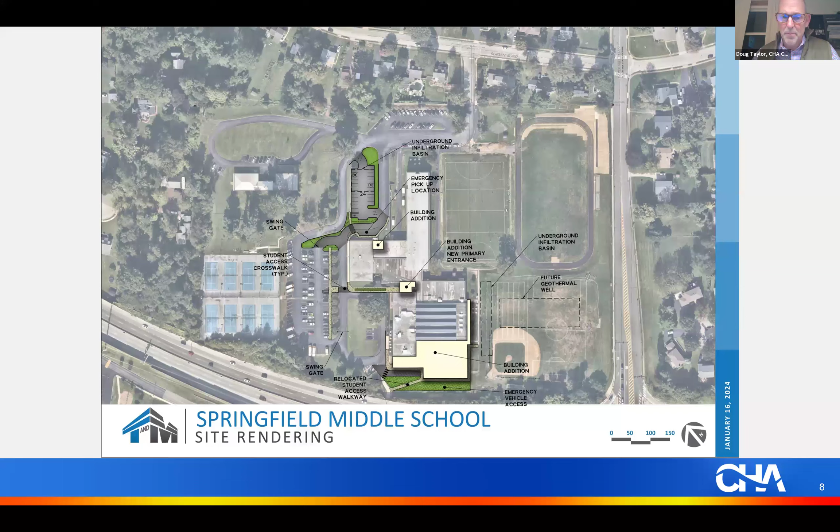Just to emphasize, really excited to be a part of this team and get this project started. My focus on this presentation is to talk about all things construction and what students may or may not see while they're actively at a school while it's under construction.

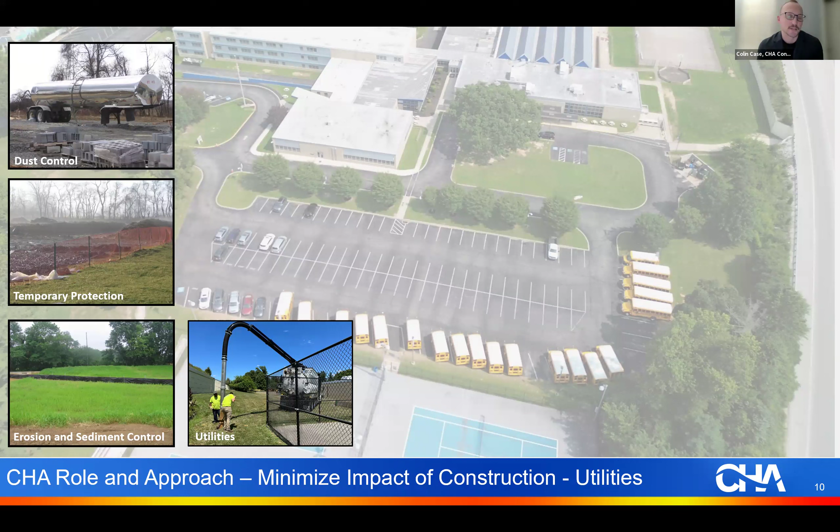Thank you. So we always make sure we have a student and staff first approach and construction second. So anytime we develop a phasing plan with the district, we always make sure that students are always separated from construction, and I'm going to talk a little bit about how we do that.

We also, Amy touched on, we're going to start having construction meetings with the team. Part of those meetings, we're going to start reaching out to the township and set up how we're going to perform inspections on the project, but also just start to build a really good relationship with the township.

And then the neighbors nearby. The district has been a great neighbor to all the local homes nearby, and as a construction team, we'd like to carry that through and make sure we keep a good reputation with everyone surrounding the project.

This project, we always make sure we're very sensitive and responsive when any issues come up. Construction is a little chaotic at times, but with our phasing plan, we try and reduce that to the best we can. However, if things do come up, we have such an experienced team, we can act quickly and get things resolved. However, we like to stay proactive at the same time.

We have a lot of proactive measures in place. I'm going to talk about them a little bit in more detail as we continue through the slides here.

We will have a very strong presence on the job site every single day. So there'll be strict reinforcement of any of the contract requirements, any safety programs, anything related to this project, will be on top of it.

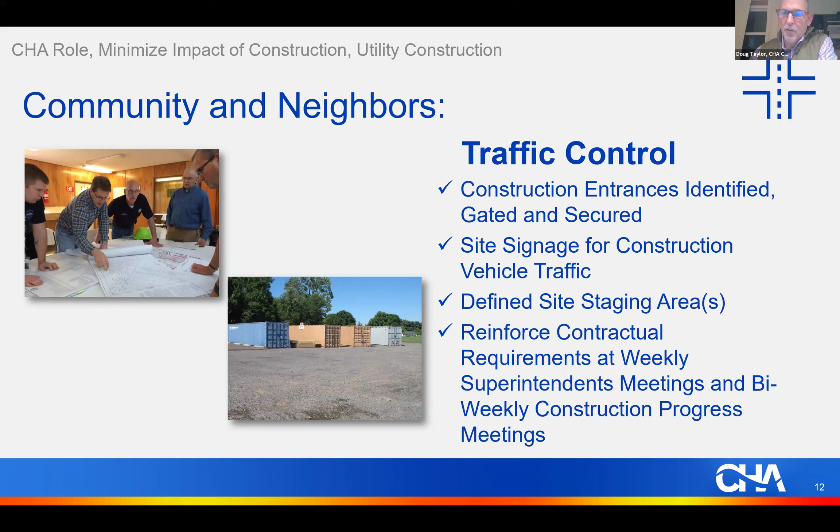So some of the things you typically see on job sites: we're going to have a decent amount of demolition going on in this project as we rotate around the building in the various phases. We have a strict construction waste management plan that'll be enforced by our team. Each contractor is going to supply their own dumpsters. There's supposed to be daily cleanup happening every day, so the job site should never look like a mess. You should drive by and say, wow, what a clean, nice looking job site that is.

And we'll be there to enforce that and make sure that's what you do see as you drive by the district. As I mentioned, there'll be chain link construction fencing and gates and entrances around the project. Those have been strategically planned with the district to work with the parent drop off, the bus drop off for students, and then staff parking as well and visitor parking. So that's been carefully planned ahead of this project before it was even out to bid, and now we're ready to execute.

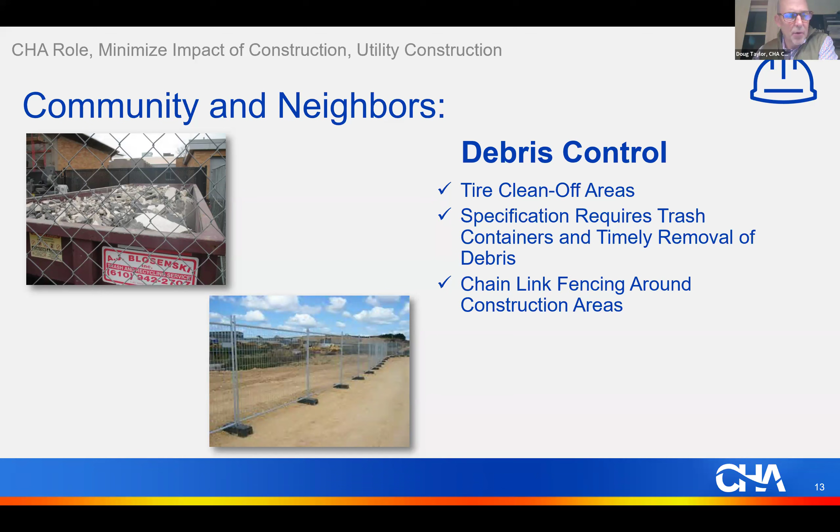And I'll also add to that emergency egress from any of the existing doors that might have been in that area.

So some other things that we're going to be maintaining while we're on the job site. I mentioned construction entrances, but there's a lot of other erosion and sediment control measures that will be out on the project. These are to make sure we keep the mud and dirt onto the job site and not onto the community roads or the school district roads. So there's things in place like rock filters, silt fence, and there's going to be a temporary sediment basin as we do some geothermal work out on the ball field.

And all of these measures are not only enforced by our team, but we also have support from the Montgomery County Conservation District, who will be making periodic visits. They're making sure we're keeping things maintained and keeping stuff off the road. So we have a lot of support from the local conservation district to not only enforce what we have in place, but also help us out if something does come up, because sometimes there are issues with erosion and sediment control, and they're always offering assistance. But I think we have a great plan, and hopefully we don't have any issues like that.

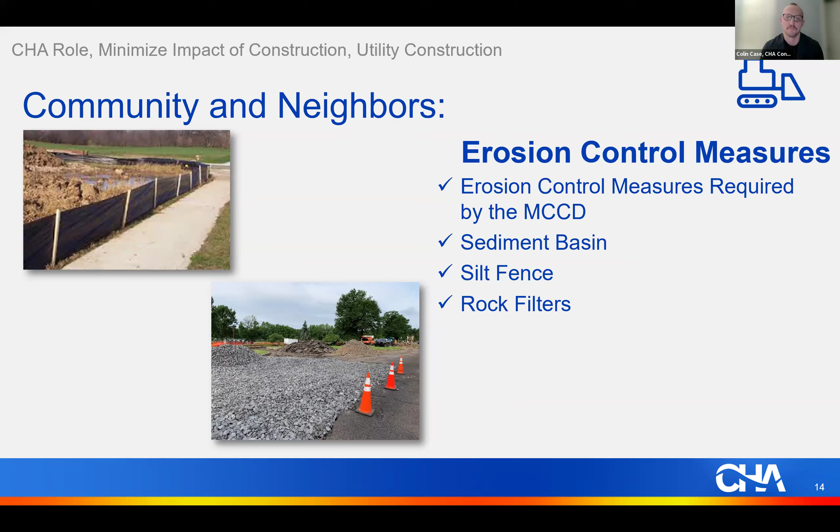Thanks, Doug. Next slide. Okay, some other things that happen on a job site.

This year in particular, we saw a lot of issues with dust on our projects due to the lack of rain we had over the summer. So what's great about our front end documents is we write it right in the specifications that if there's ever a point in the project where we see a lot of dust around the job site from lifts driving around, or anything construction related, the general contractor is going to provide some measures of dust control. Essentially what they do is bring out a water truck, spray down any area of construction that has mud and debris, and our staging area, and that'll keep the dust down and keep it from getting airborne. So that's already built into the job.

Then also, sometimes a truck may get into some mud and drive out on the road. We'll make sure that gets broom cleaned if any mud does actually exit the job site, and we'll be there to enforce that quickly and make sure it doesn't cause a disruption.

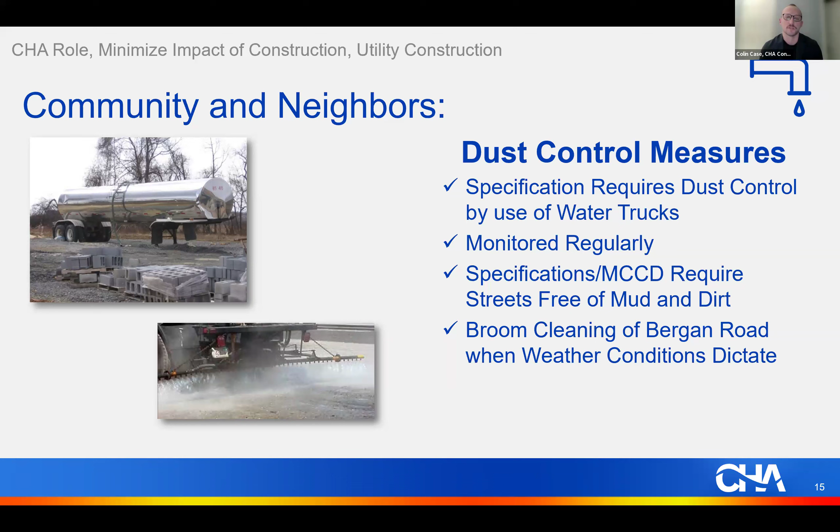As far as utility construction, we did a lot of careful planning during the phasing plans for utilities. They're very important on a project. You always want to have a very detailed plan of when utility shutdowns are happening. On this project, we have a couple: a relocation of a natural gas line, a domestic water line, and some stormwater work. Those are all phased so they will not disrupt the school in any way. If any shutdowns are required, we'll make sure they happen when students and staff are out of the building, over a weekend, or during off hours, to make sure there's no disruption.

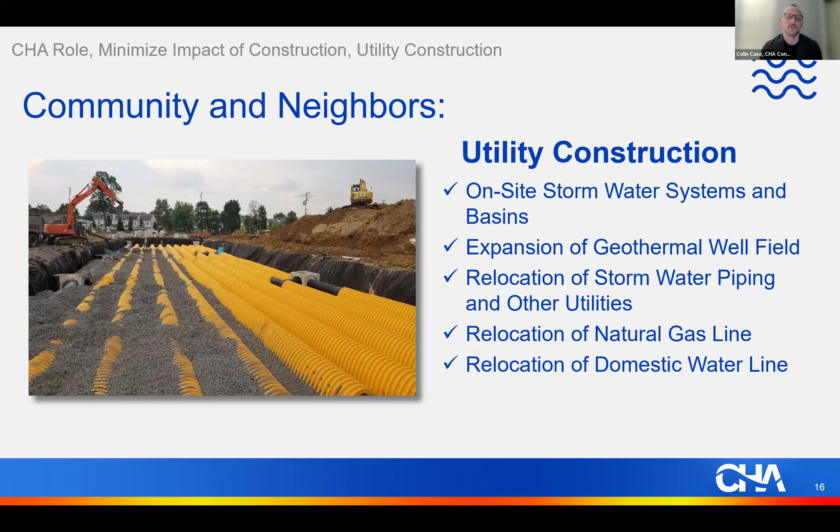There will be some things you see as you're driving by throughout the project. There's a picture here of an underground chamber basin for stormwater management. There will be two of these going in, mostly over the summer, where the existing entrance is now and underneath the parking lot. So when staff and students let out for the year, they'll come back to a brand new parking lot, and you'll never even know it happened. That's just one thing we do to make sure there's no disruptions.

I've talked a lot about construction phasing. We have prompt site stabilization, so when we tear up an area, complete the work, and put it back, it's going to be stabilized very quickly. We'll get it seeded and strawed and make sure grass is growing as quickly as possible.

Our phasing plans have been carefully laid out with traffic plans from the district, for student pickup and drop off and parent pickup and drop off at the same time. We meet almost bi-weekly with the school district team to make sure everybody's on the same page and we're continuing to communicate. I'm sure at some point we'll find ways to improve this plan, and we'll do everything we can to improve it, keeping school going first and construction second, hopefully in a harmonious way.

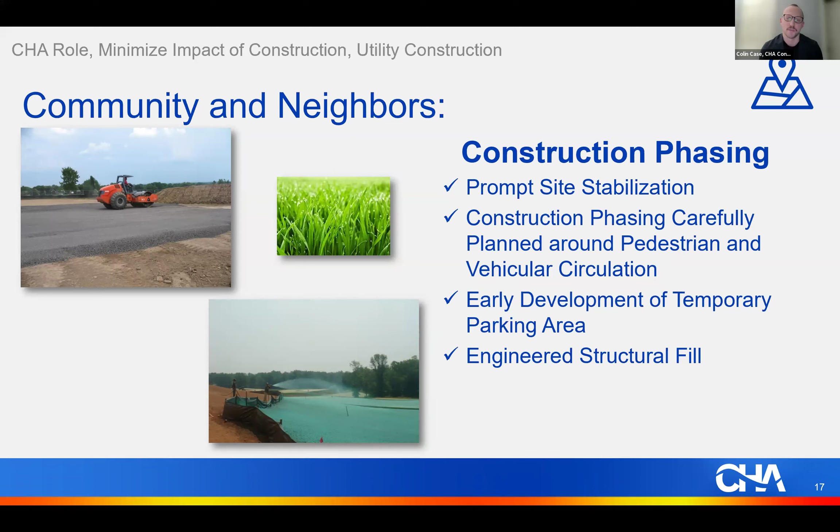As far as inside the building, you're going to wonder what your student will see walking through the hallways when there's construction on one side and classes on the other. We did a very good job carefully laying out construction and dust partitions. Essentially, we'll build a temporary wall, likely with a door on one side, going full height to the bottom of the deck, so there's no possible way dust can get out of that space while under construction. That barrier also keeps students out of the construction area and keeps contractors out of the building, since at no point during the school day can they pass over to the occupied space. These partitions won't just be a plywood sheet, they'll get painted and look like a wall. You'll never even know there's active construction work going on the other side of it.

They also help with sound, since sometimes there are noisy activities, especially during demolition. Our job while on site is to make sure any activities that create a lot of noise happen early in the morning or after school's out, so we don't cause disruptions. We've also carefully looked at when there's testing throughout the school year, and we make sure contractors work second shift during those periods so there's no disruption during critical testing times.

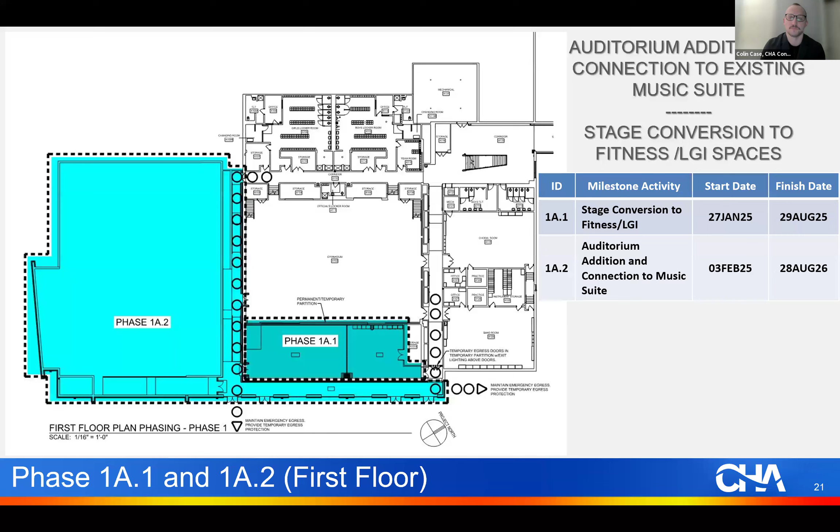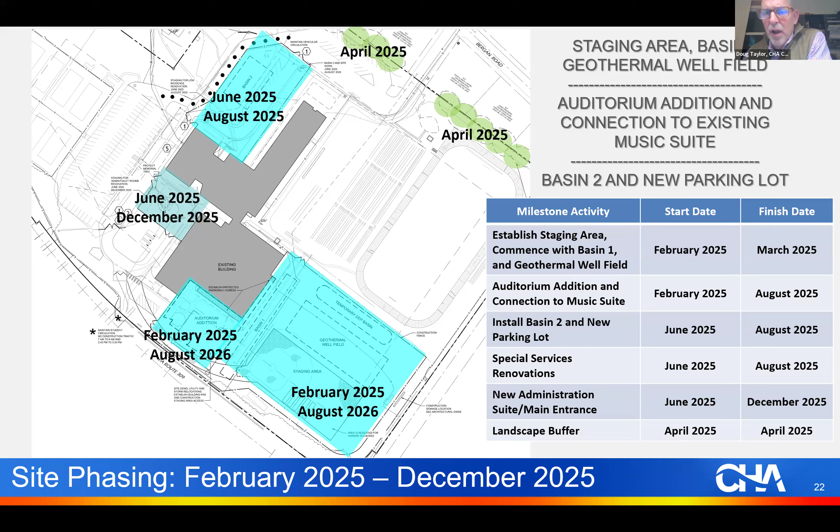I think the only other thing that I'll add to this slide is when we did, and we're still wrapping up, the small project over by the track, the township had asked that we provide a planting buffer between the homes at Bergen Road and the track area portions of the site. That was agreed to be provided, but we put it into this project for economic reasons. So where you see the April 2025 and the little green trees along the top, there will be some planting buffers added between the homes and the district property this spring.

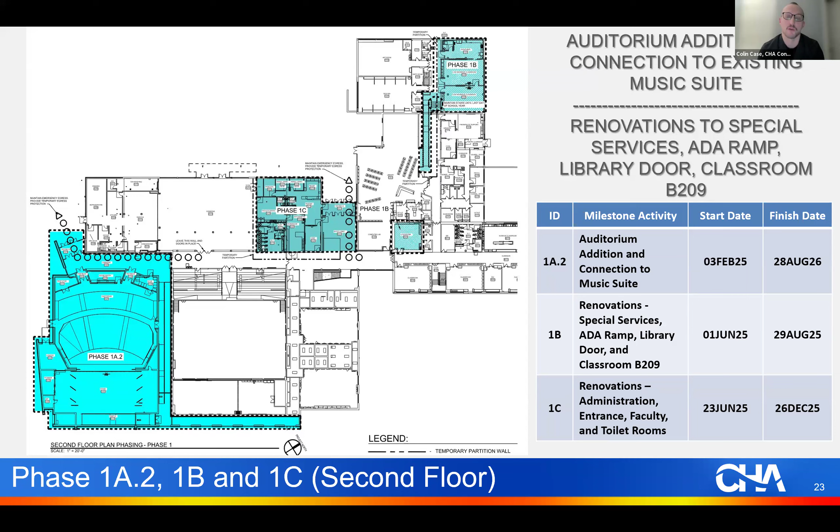Miss Brady and I have already been working with the library to make sure there's little disruption to the library space as we get started on that area, keeping books protected. And then from there, we're going to jump over to some selective toilet room renovations and also renovations to the existing fitness center, the existing stage on the cafeteria side that we're going to turn into the new admin suite and new main entrance. And that'll run from June to December of 25.